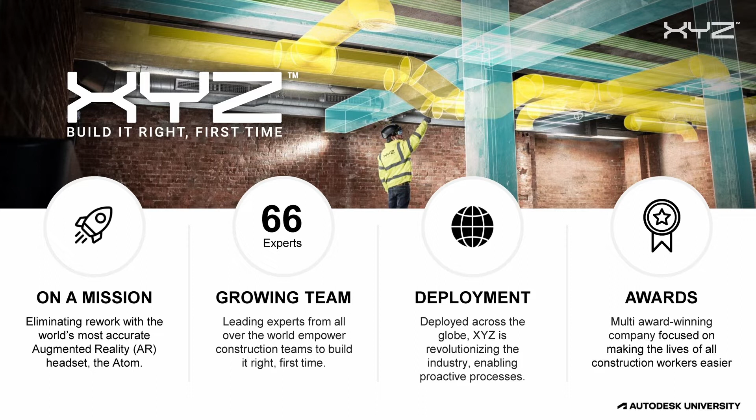Our team's growing. We're 66, I think it's now actually 74 as of today, and we've deployed all across Europe, launched in the US this year, and soon to be in Japan as well, so a really exciting time for us as a business.

So I'm going to talk about the problem. I really want us to get into this, and discuss the problems we faced, and some of these are a tale as old as time.

On the PM Group journey, we had inconsistent translation of 3D design to actual construction - I think everybody's feeling that pain. We had no absolute root cause data that could be trusted as unpolluted or uncorrupted. We had construction blaming design quality, and the age-old design then blaming the lack of construction input at the right time. We had an impact on schedule due to rework in the field or redesign to accommodate field errors occurring in the field. We had an impact on cost due to rework or redesign to accommodate those field errors. And overall we were experiencing a loss of confidence in the project and delivery team as a result of all these issues.

We quickly realised we're not alone. This is a common denominator across every construction team, every construction project, regardless of the company you're working for. Everybody had the same pains. We noticed what the industry wasn't talking about.

So 30% of construction activity is actually rework. 35% of construction professionals' time - which is over 14 hours per week - is spent on non-productive activities, including looking for project information, conflict resolution, and dealing with mistakes and rework. They're staggering figures.

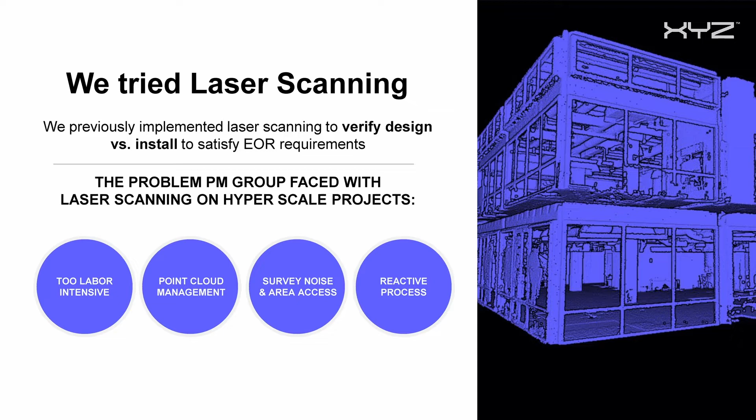The point cloud management itself, the size of the files were huge, the survey noise and area access. So again, if you're in an accelerated program trying to deliver a $1 billion data center, you know your room is not going to be empty for your laser surveying. So you're going to have noise, you're going to have obstructions. So are you investing then again to remove the noise? That's more labor, right? And that's a skill set that you can't spare right now when you're trying to deliver your project.

Overall, we found it was an extremely reactive process. Whatever way you go about it with laser surveying, there is a delay by the time it gets to your machine to do your comparisons, right? That's too long. What we need from technology: managing huge data sets and models requires new technologies that allow us to be more proactive, to reduce rework during construction, and improve the communications overall with the project team and of course our clients. We want to bring them on this journey with us. We want them to be able to make the decisions that they need to proactively, preemptively, avert the crisis from ever materializing in the first place.

We have the expertise and we have the processes. Now we just needed the technology. Easy to use, empowering teams to champion digital technologies over traditional methods. Technology to efficiently implement our processes and deliver value in schedule, quality, safety, and turnover. Technology that enhances our quality processes and drives up our company culture and ethos.

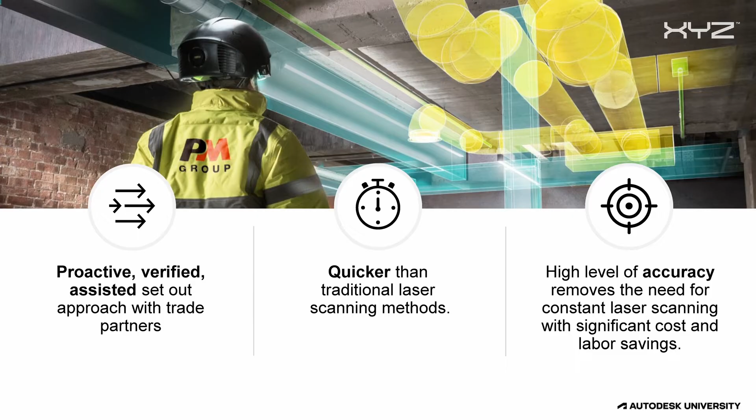We had quicker than traditional laser scanning methods, and we had a high level of accuracy, removing the need for any laser surveying whatsoever on our project. That paid for this technology fully, right? I just want to put that out there. So let me show you this video of our team at the site.

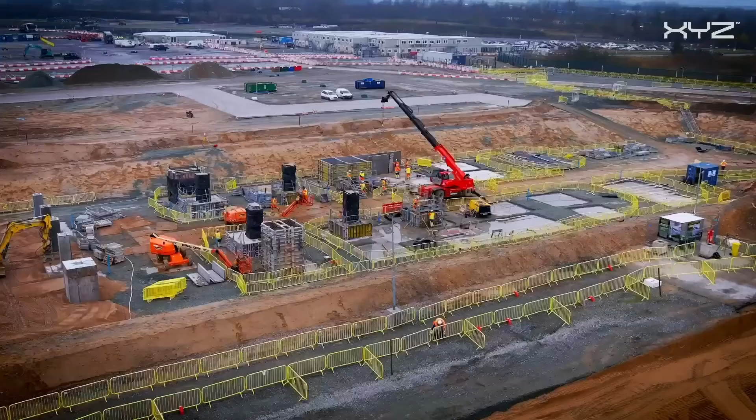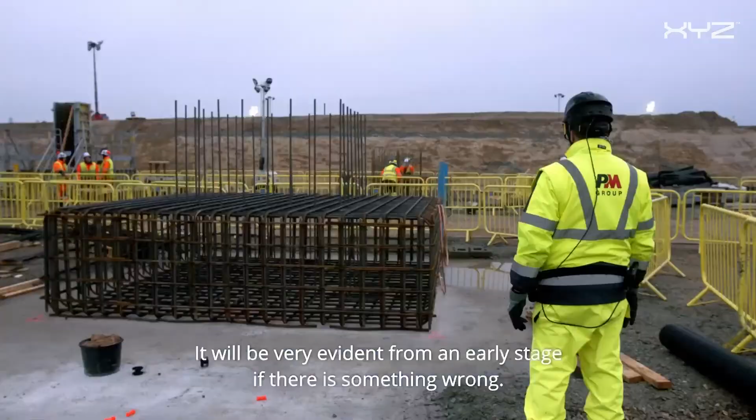What we all want to know at every course of the project is if things are right. The killer is rework. To redo a job is probably going to cost you 6 to 8 times more than it would cost you to get it right first time. Time is money in this industry. Paper shouldn't be involved in construction going forward. The cost-saving potential of getting it right first time are huge. It will be very evident from an early stage if there is something wrong. There is no time lag between what you actually see and getting results.

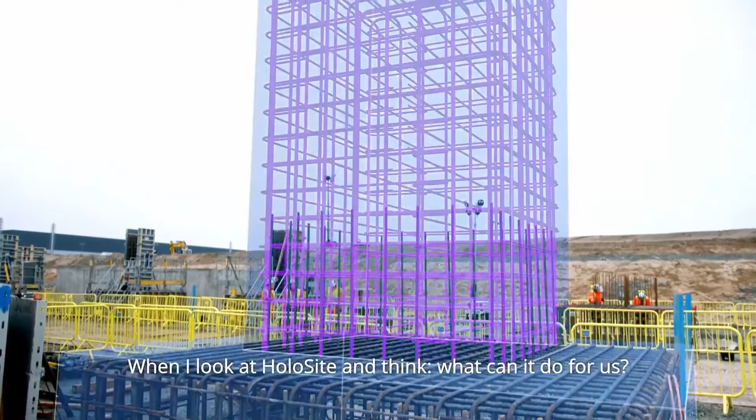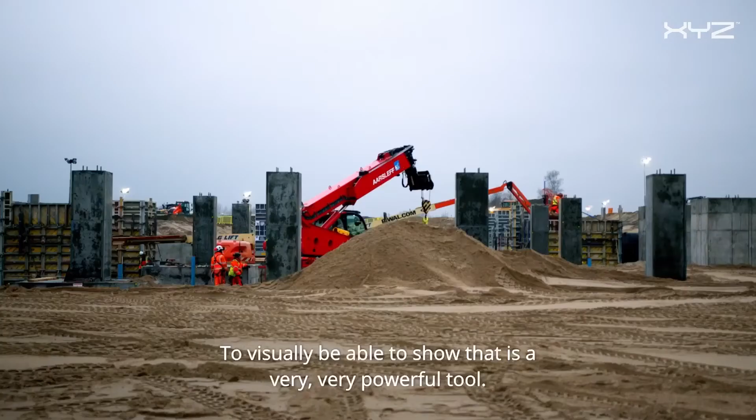When I look at HoloSite and think, what can it do for us? It'll help us identifying early clashes. Being able to show the accuracy of what we've done and what we're going to do is something no one else can do. To visually be able to show that is a very, very powerful tool. It is a game changer. It helps us with constructability and helps us build safe and fast.

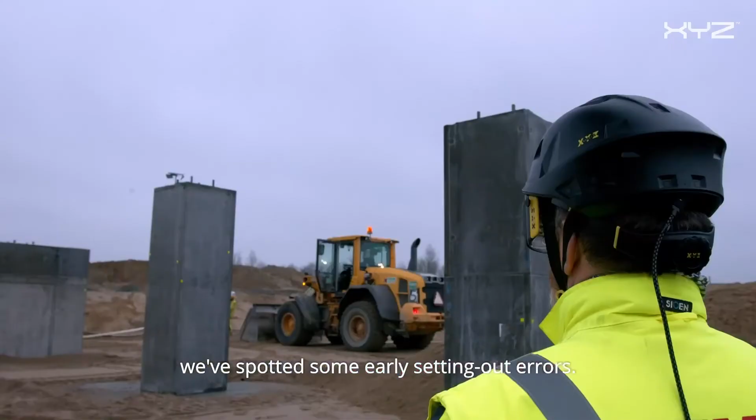I can already see the huge benefits using HoloSite. We've spotted some early setting out errors. We've already captured a couple of items on site ahead of time. It's just fantastic. I think it's going to be a massive win for the project and for the industry as a whole. I think it's the future, and we're delighted to have XYZ on board. To be able to visualize something is well and good, but to be able to see it, that is something that is a whole new level of experience.

I always get goosebumps when I watch that video, and particularly when I see Jerry. He looks like a Viking out outside Denmark.

But they're the ones, and I think, you know, any of us could stand up here and say how great this technology is, but when you hear it from the boots on the ground, it really validates it, right? And these are not guys who are well up on tech. These are some of my silver foxes that are out there, and they're mentoring and they're teaching. And they are the ones pushing and driving this culture change from a site level, eager to adopt, which I think is half the battle.

So what happened in deployment? We had to plug our new tech into our existing processes. And that in PM Group has created a service called ARQ, which is Augmented Reality for Quality, part of our workflows.

So our model freeze process in Autodesk AEC, and inspection planning in BIM Plan, feeding into the pre, during, and post-installation inspections. The results of these inspections are fed back into BIM 360, outlining what work is installed within tolerance, quality recognition. We were using Field Next Gen in this particular instance. What work is installed out of tolerances, issues via BIM 360.

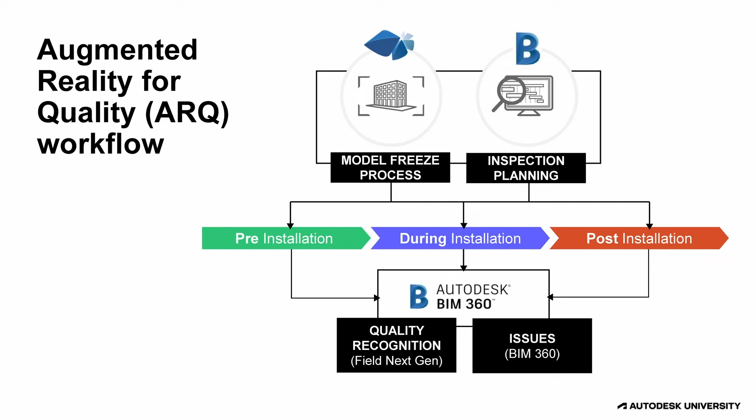Expertise, processes, technology, progress monitoring, results and a solution that is scalable within our projects. Okay? So what I want to focus on here is that by piloting this on our first project in Denmark, it catapulted into a standardization of how this process and how this service would work. So within, I think, 6-7 months, we were able to deploy on 2 pharma projects simultaneously in Ireland, as a result of what we had learned in Denmark.

What we learned in Denmark has also been pushed back up into that client's universe, I suppose, and adoption there is literally next, right? So that's going to be quite huge for them. And similarly with our pharma projects in Ireland, they want to adopt and put this into their standard way of working, seeing the benefits, realizing the benefits.

So the integration with BIM 360. So I just want to get in again the context of millimeter accuracy. Literally, I think, Walid, is like a hair, is it? That's right, so exactly 3 to 5 millimeter precision. Yeah, and they're being cautious, and that's them saying 3 to 5 mil. In actuality, I suppose it's easier for me to say it's literally a hair, right, that we're able to go through. He can't say that, but I can.

From a workflow management point of view, it was seamless. I didn't have any stops and goes. Everything was fully integrated. And what that gave me was unpolluted, uncorrupted data. So I could bring all of that data up into my dashboards. So what I was doing there was putting everything up and extracting through BIM 360, pulling that into Power BI, creating league tables. And I'm going to show you more about that in a minute. So it also fed into our federated models and our issue management, increased productivity and dynamic working.

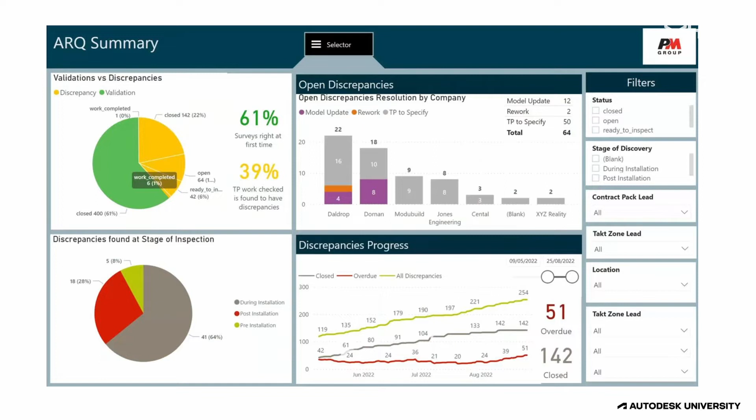So again, this shows me the discrepancies and resolution per company, their progress, are they making an attempt to right the wrongs? And again, pulling everything out of BIM 360, I was able to see how many total inspections were complete, how many were overdue, pulling that from BIM 360 plan versus where the interactions are. We've scheduled, we've teed it up for you, have you participated? If you haven't participated, have you communicated that it's not ready in that area with the rest of your team?

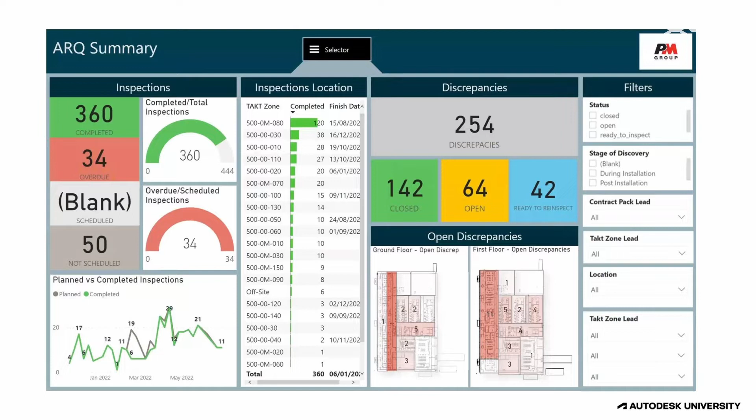We use Takt within PM Group, so we were able to break all of these down per Takt zone. So that meant that we had focused areas that needed to be complete. And we were able to show that again visually, which was really, really key to our supervisors who have this up on a giant screen in what used to be the digital war room, and now it's a digital information room. But that gave them their clear objectives every morning of what needed to be closed out. And the package managers had an orientation that day of what they needed to tackle.

All of this information, all of this data gave us greater visibility and transparency across the teams, on-site and in the office. So off-site, just as informed as on-site. Any errors that required rework were being dealt with instantly. It streamlined our workflows. We're able to create and visualize and manage issues and tasks, instantly assign them to project stakeholders in BIM 360. And again, I want to reiterate, that happened at the point of view out on site.

If the ductwork was out, our AR technician was pinpointing and tagging that directly to the quality team and also that trade package owner responsible for that space. So that was instantly. Superior information flow. We completely removed the need for laser surveying, which usually takes 2 weeks to get results. We were proactive. We were making decisions ahead of any conflict, ahead of any real critical issues happening out on site.

So as the design becomes the as-built, we're driving culture change for better design outputs, all the way back up into the conception of design. What I mean by that is, historically construction gets a bit of a beating, right, if you're not installing as per the model. But what we're trying to say is that, well, right now, what's coming in the model isn't always buildable. It's not constructible.